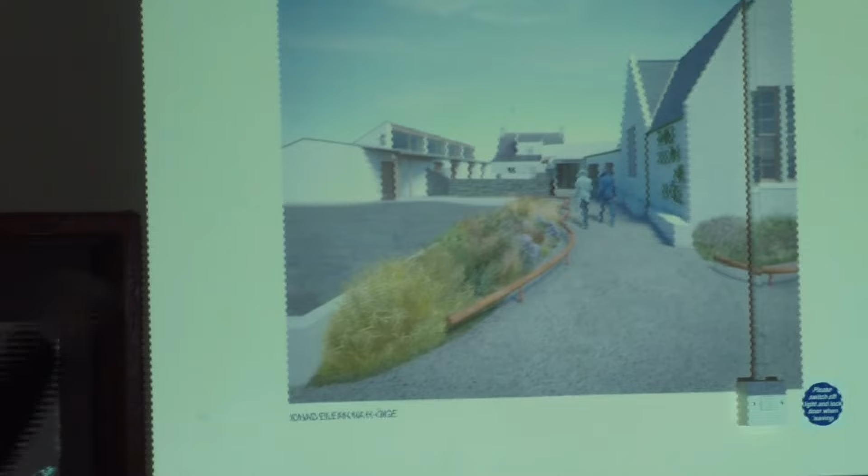And then Eilean na h-Òige, which is the working title for this project up in Eriskay - I've just come from there today actually - is essentially one where again they're inheriting a building, and it's in a bit of dire straits. The council abandoned it in 2013, I think, and the water's been coming in the roof ever since. So we're actually right now saving that. They're on site doing all the slate works, allowing all these other functions around in order to plug in and support the heritage aspect.

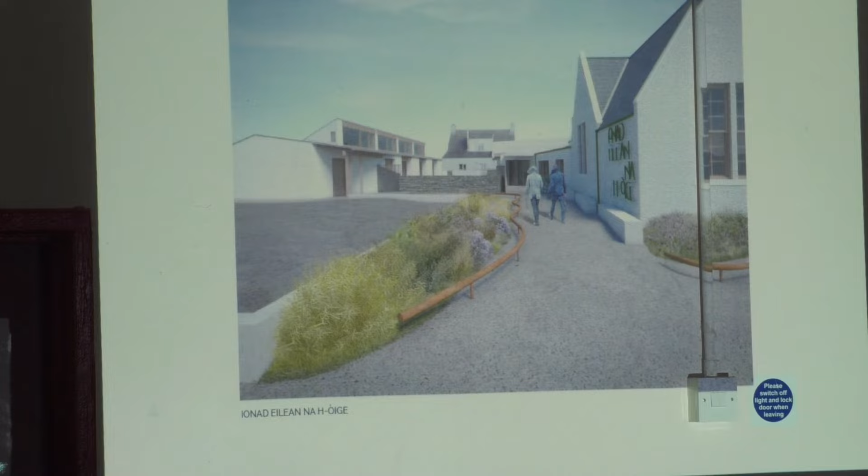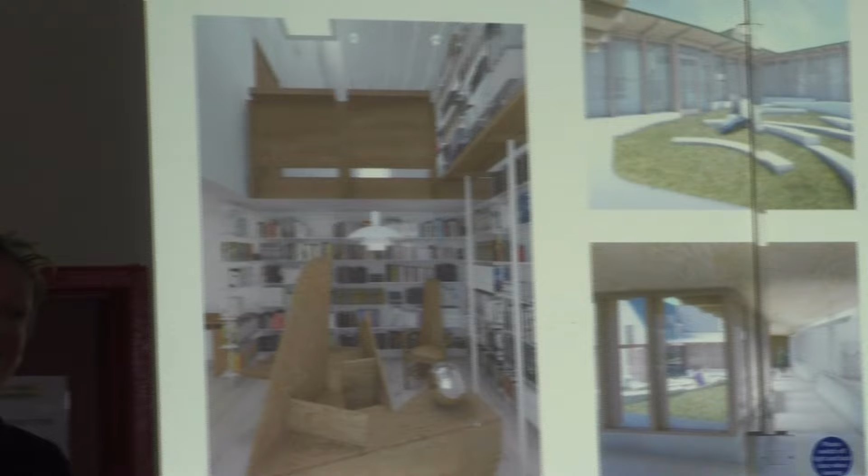You might like the models, you might like the other bit - we want your comments and commentary, because it can be adaptable, and it should be adaptable, and now's the time to do it and make sure it's right. Then critically, to record support as well - that's fundamental for the success of the project.

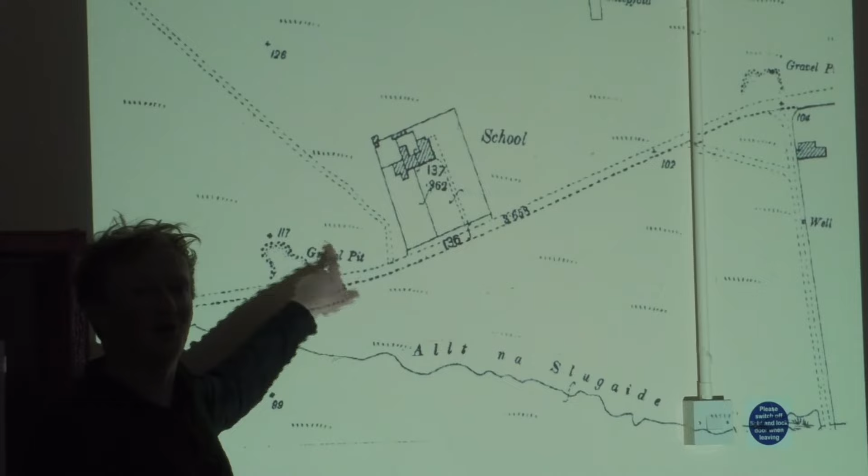So onto the interesting one, or the one we're here for today. In terms of historical parts, we go into as much history as we can in a lot of these projects. You can see here, this is the main road, and there's a gravel pit here, which is where Gordon Diesel's is now, roughly. And then the school appears here first of all in 1890.

It's not too long - a couple of decades maybe after the Education Act. But it starts off quite far back from the road, closer to here, and then starts to adapt. I'm actually just wondering if you guys can see - is it okay? I'll try and make it opaque.

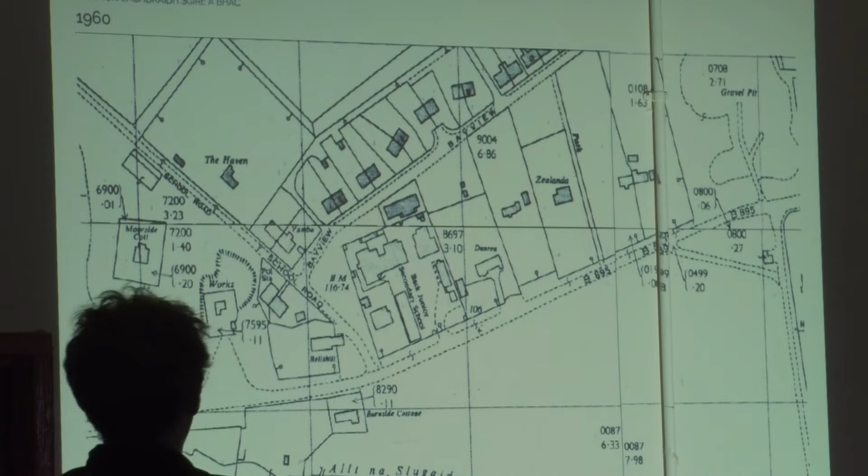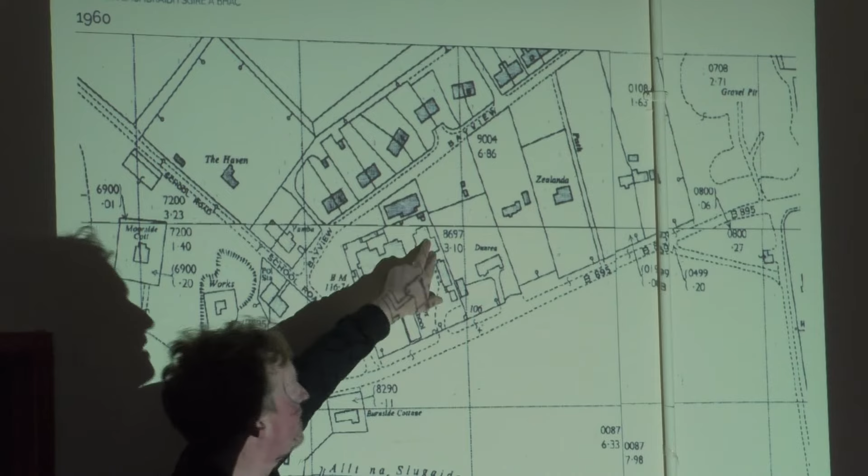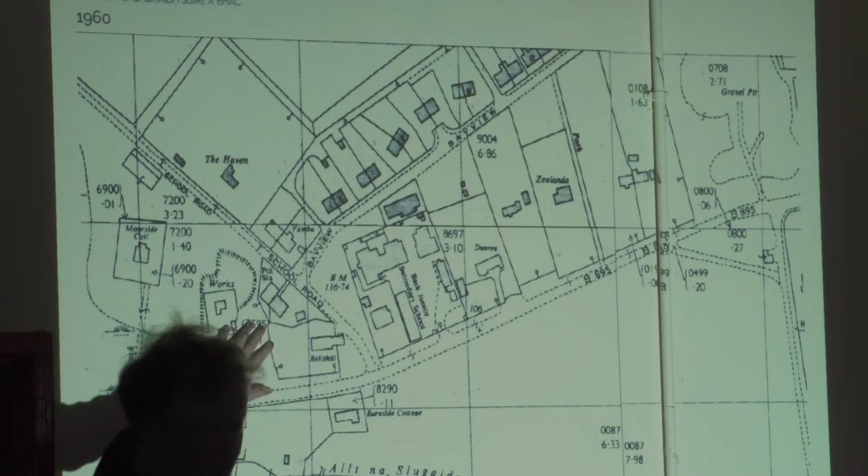By 1960, you can see that everything is growing around it. At the same time, this building, which is obviously the first one, has been extended with another annex, and there's the typical kind of flat-roofed canteens and other buildings slotting around it. The schoolhouse has been built by then. Gordon still hasn't appeared yet, not on that map anyway.

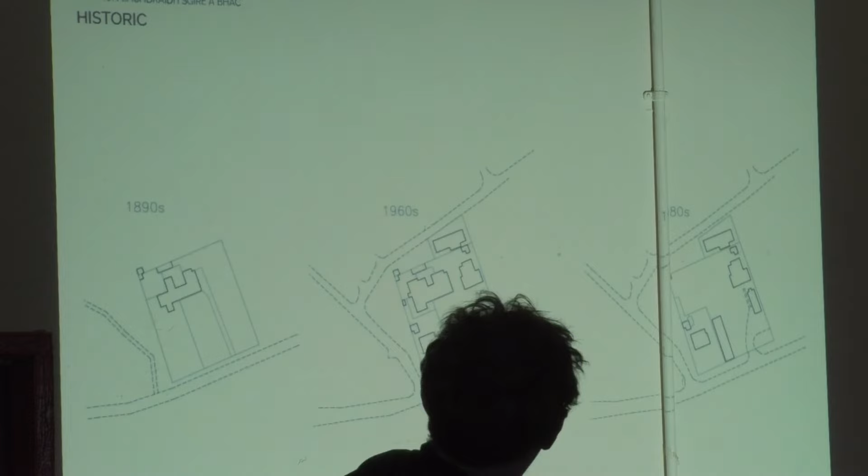By 1960, you can see some of the site starting to change slightly. Then by 1980 - oh, where is it? It's up there... here. Oh sorry, I think it's off the map - I'll need to tell the office. But anyway, there's the diagrams of the evolution of the site, and then I can't see through the pipe. In the 1980s, these buildings are starting to get demolished, and by now they're gone, essentially.

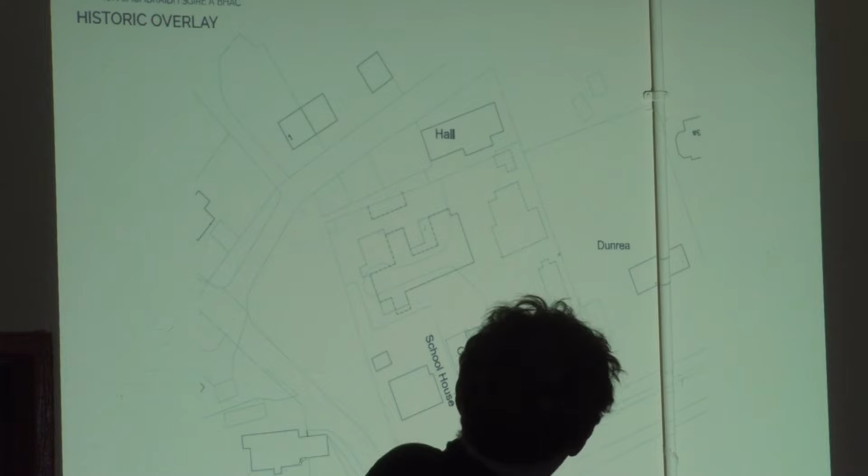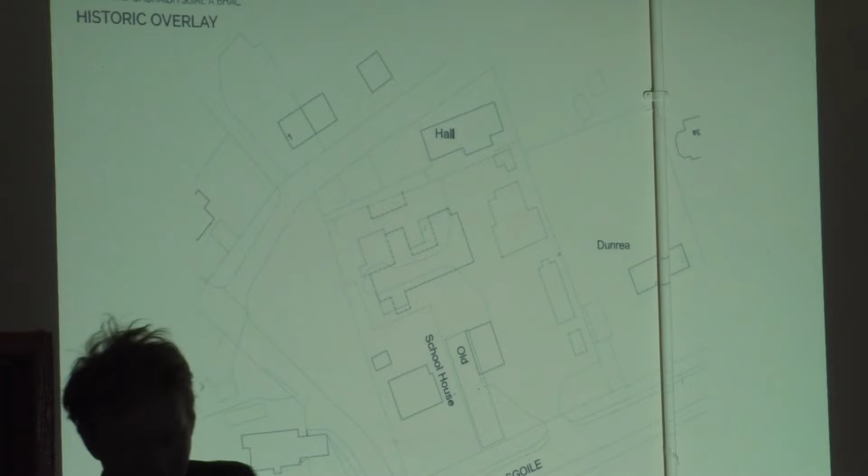That's an overlay of what we have today, which is the shed down there. In here we've got the shipping containers, but the dotted lines are all the previous buildings that were on the site - so it was quite a big camp. Well, when I say big, it was quite significant, and it's a shame they're lost, but we can't cry over spilt milk. You can see the tower here, the canteen building - I'm not sure which one of these was the ski net, I'm not sure.

I think it was one of the low ones. Was this one? Yeah, right. Okay, and then, you can see how quite lovely that is. I quite like it. But yeah, sadly gone.

But in reality, as Anna was mentioning, this site is quite emotive also - one, for it being a kind of vacant site, but also it's a very meaningful site for the fact that it was this, the school is the centre of a community really. And although we still have Sgoil a' Bhac, this site was where it was, and it's in the middle of the community as well. It's right on the main road.

And right now it's in a bit of a state. So there's kind of meaning and appropriation to it, which is quite interesting as well. But as you can see, you can see how vacant it is from space.

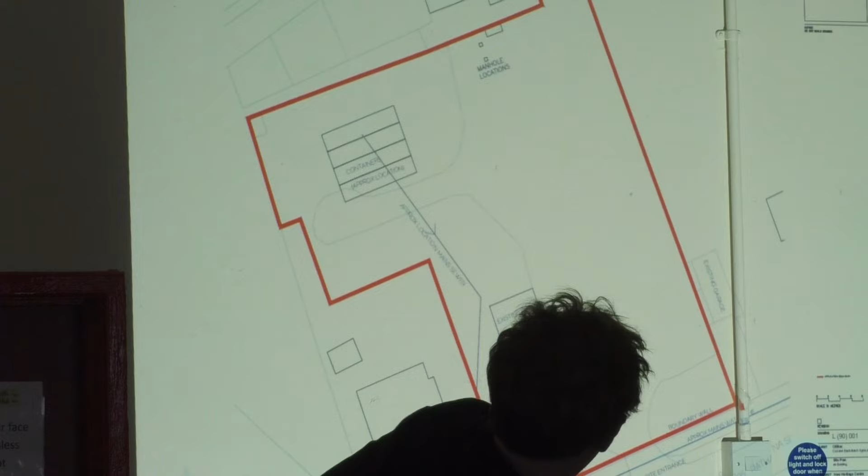And as a site as it is at the moment, going on to this - we're going to disagree with Scottish Water here. This is apparently where the water main, the sewer main is, but it's clearly wrong, and we knew that. I think we're going to prove them that it's not right. But in any case, that's not the main water here as well.

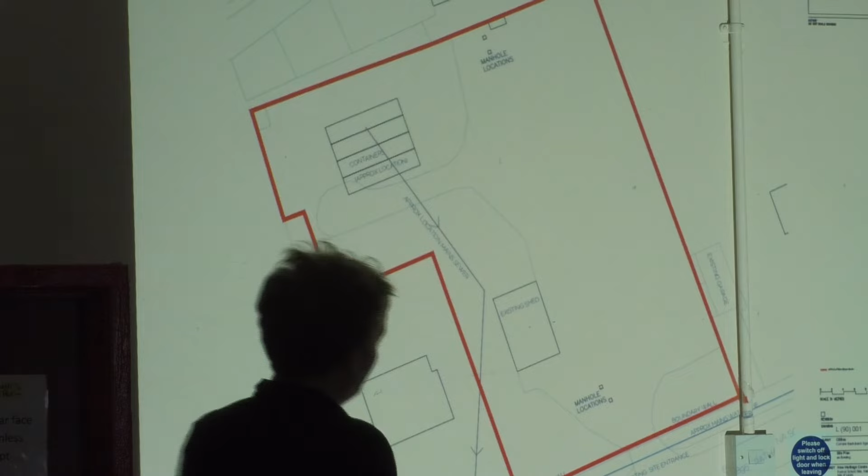But within the feasibility study, which was conducted maybe about a year ago - I can't remember, yeah, it was completed at the end of last year, 2021 - through this, the first things that we started doing was actually to analyse the site and see where's appropriate for siting a new building and where's less good.

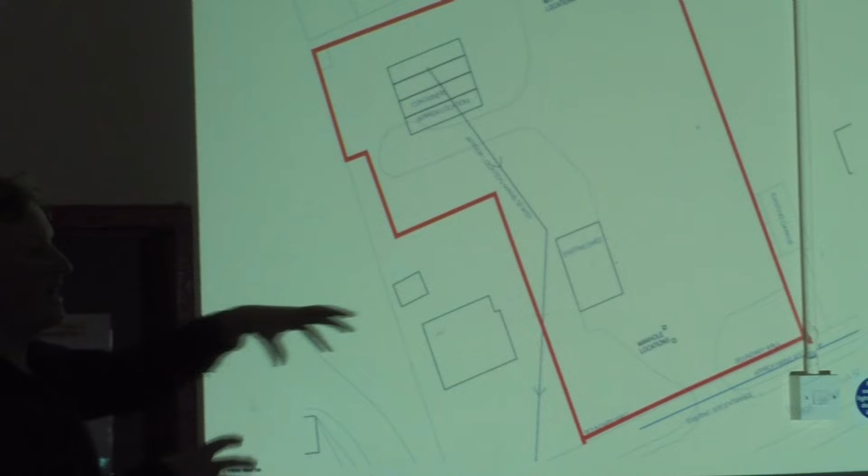So, because the red line is quite a large area really, you could almost anchor into almost anything. And the site that we've proceeded with through the analysis is close, towards the end of the road, to be open and public and to be part of that kind of streetscape, really, as part of the community, and to be seen really.

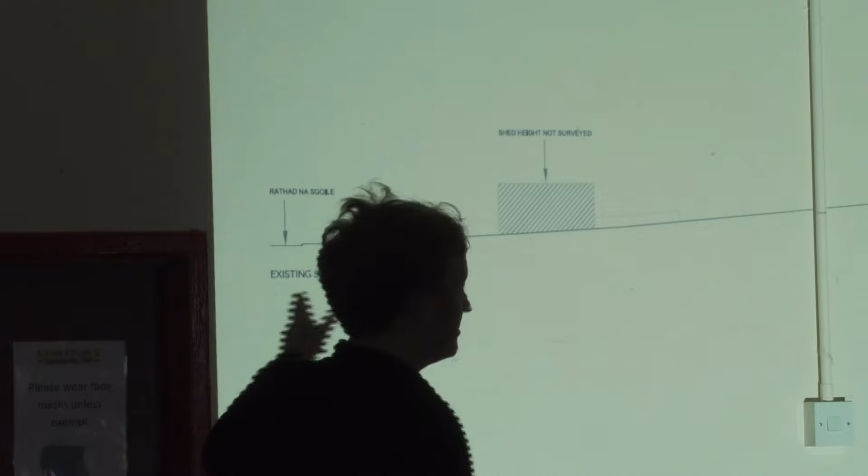And the site, although this isn't properly topographically surveyed, is sloping up the way, we think by about 2.5 meters, maybe more, from one side to the other, which has an impact on the levels, and you'll see in the design how that's there.

So in terms of the brief, the brief was to test as well as a site, to test how the building could potentially work. So the suggestion was a space for gatherings, much like this really - I'm just trying to think of whether we could fit everyone, and we could.

So in future this could be held in the new building, but also that kind of flexible space that can also be used for exhibition and display, and other events too. It could be choir practice, it could be cinema, it could be knitting, it could be all sorts really.

But there was also a discussion around not wanting to take away from the established facilities also, so larger events possibly being in the upper hall centre or vice versa. But in any case, a big flexible space in the heart of it.

Also about a small kitchen as well, which we liked in the brief, because any Hebridean welcome is always with a cup of tea or next to a stove. And an archive facility, a store facility, in order for collection of artifacts.

One thing worth mentioning is also within the community network, a lot of them actually have different - I wouldn't say priorities, but different things that seem to be their centre of gravity really. So Ness have an amazing archive in genealogical research, and also have good artifacts as well. Tons of stuff from memory, I'm not sure how many artifacts. I was going to say what we have, because I'm still Tolsta-ian, I think, and I can maybe tell.

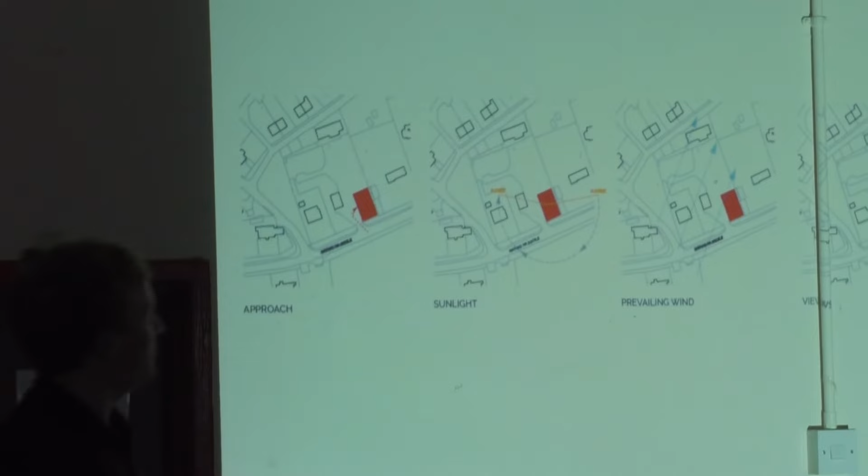In terms of site analysis, when we're thinking of the anchoring, this red blob is roughly the area we're thinking of. First is the matter of approach: one of the challenges is that cars need to park around the back, and then from the street you've got this arrangement, so the door is kind of in the middle.

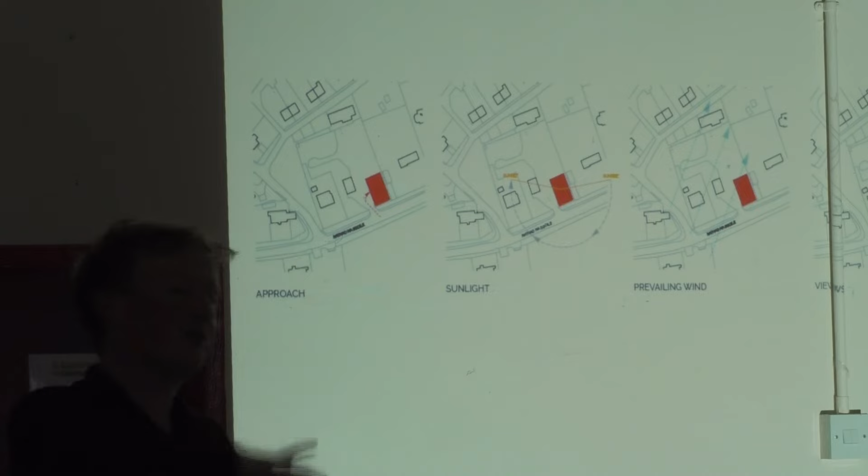The sun path, so I'm analysing where the sun comes from, where it sets, where the views are, where the prevailing wind is, which means we turn the door away from it, and the major views. So just the basics.

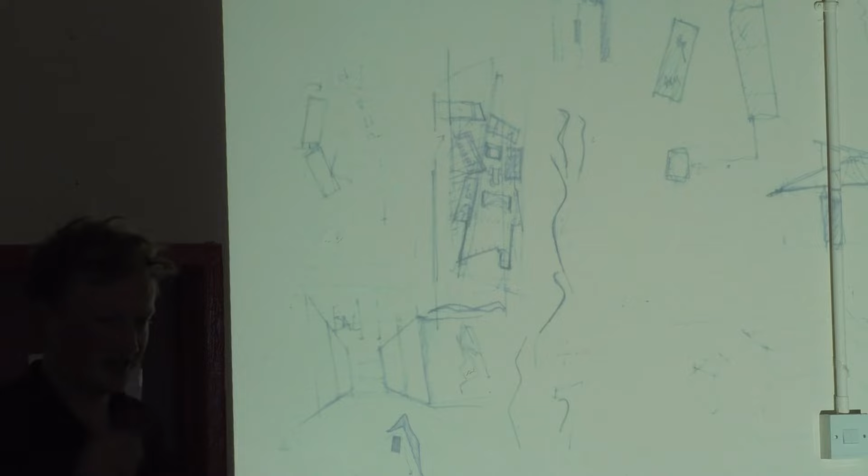Then in terms of starting to think how the brief begins to work, this is only the tip of the iceberg of some of the drawings and sketches, starting to think of concept development. In a way some of that is marks by Miró actually, Birth of the World. But anyway, starting to form a project around that, thinking of hard edges, soft edges, and arrangements.

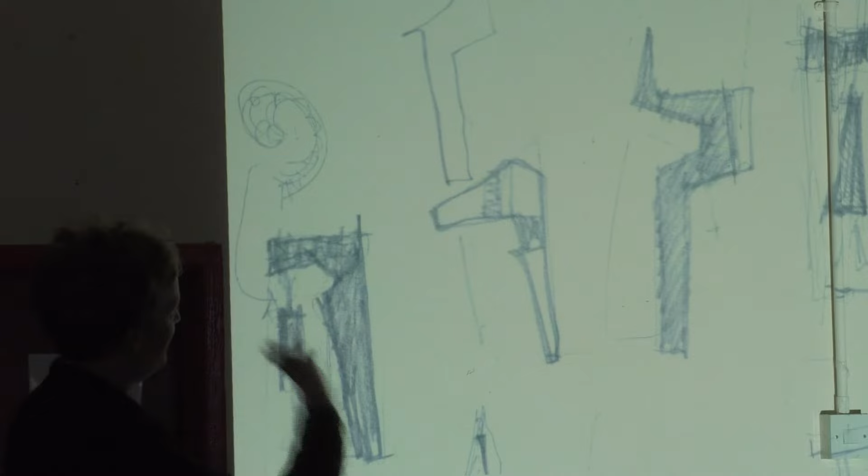Going through the arrangements, but also testing completely in order to see how it works in other directions. What we're putting forward at the moment is still capable of doing that and being adapted as it goes. So okay, a few of these.

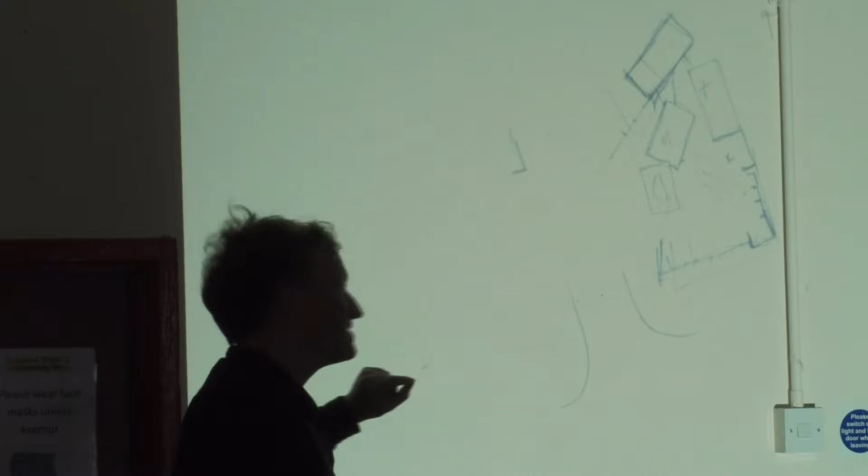Then starting to actually make these drawings make a bit more sense is starting to see how we can arrange things on site and make them work with scale. So things like the subsidiary accommodation towards the back, toilets and stores, and then coming towards the front, as you'd probably expect, in order to open it up again.

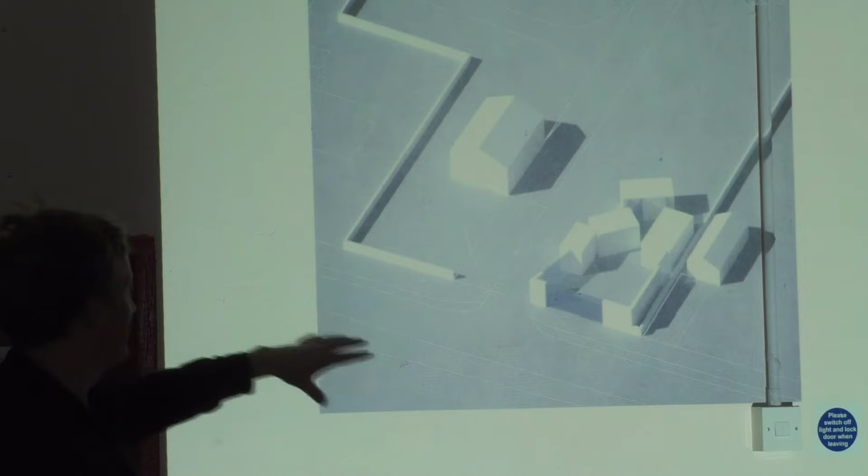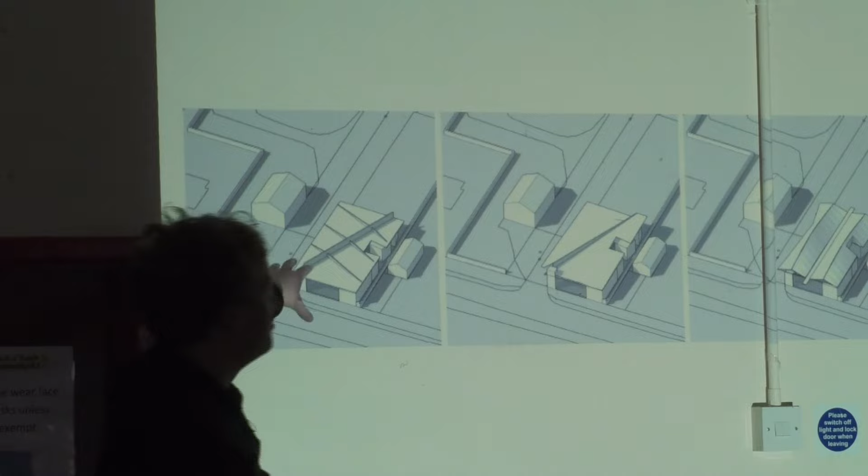Then starting with the kind of block models, which we do with card in the office as well, in terms of some arrangements, and starting to trial how these can work, and then how they develop - are we starting to get too big, do we want some sort of roof form, what the materials might want to be, and what the meaning of those materials might want to be as well.

Then things start to develop and adapt and change and test, all the way through in consultation with the community, around discussions of gardens or retail, what the nature of it could be. The reason we're showing this is just to show how what you see at the moment has come to be.

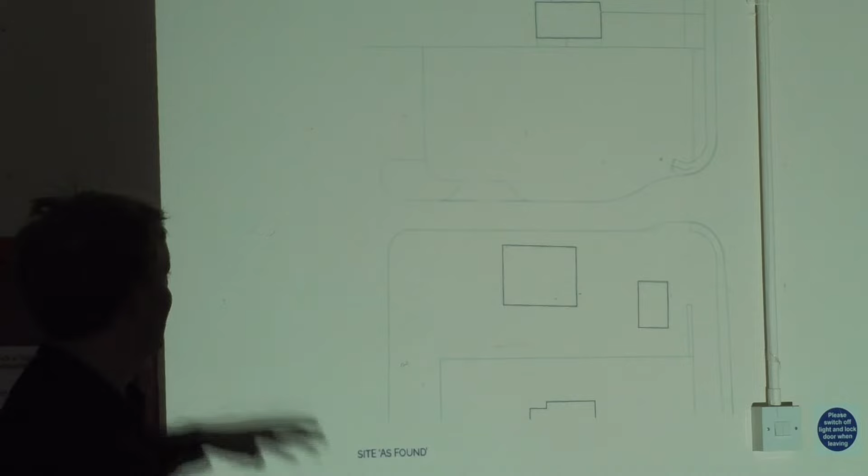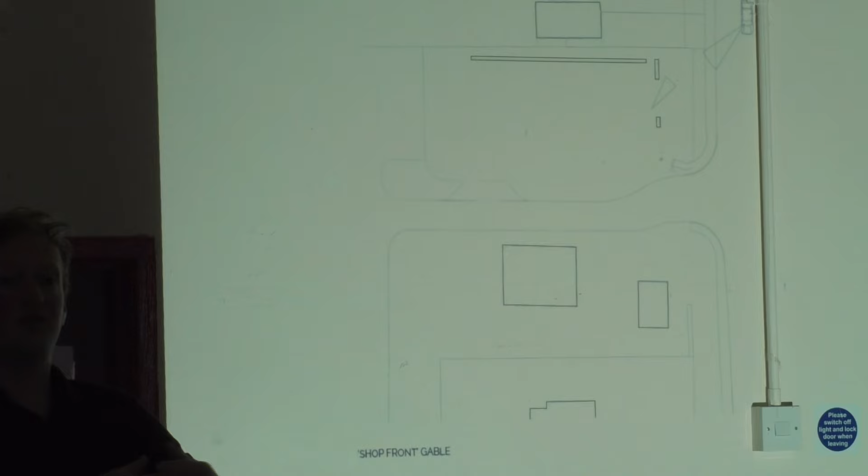In terms of the site then, we have a rough area of roughly where the building would be situated. From there we establish a boundary in terms of an edge, and then think about this gable that's open and inviting and friendly, a signal to people that this is a public building, a civic building, and you get glimpses in and glimpses out.

If there are activities going on, it's to draw people in at the same time, so that you can get people who maybe think they're not interested by history or heritage or museums, but will see something and potentially be brought in. So it's a shop front really.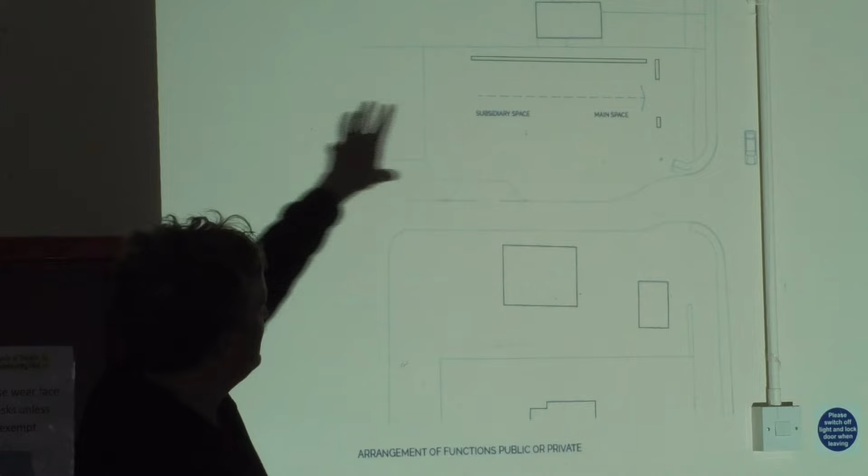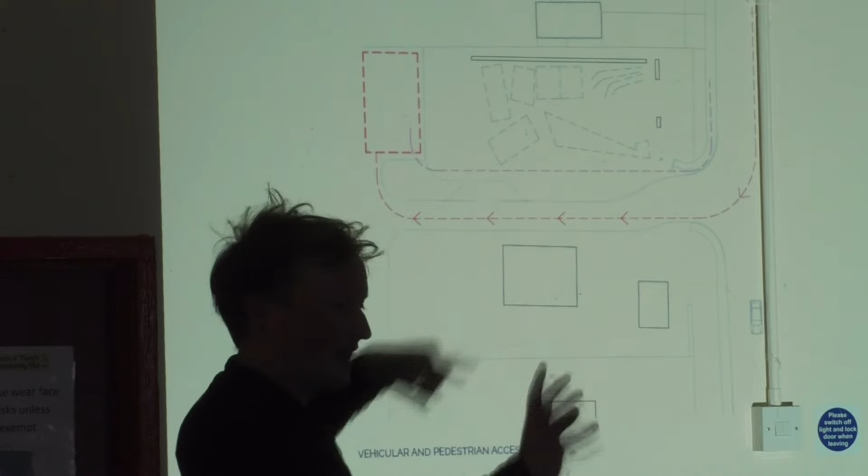Then the arrangement of subsidiary space to main space through the site, so the service spaces at the back, and then the arrangement of the brief comes together. First we have parking at the back, taken as read, the arrangements of how people arrive at the site and then at the building and exit, and where the door might be, kind of in the middle of that elevation.

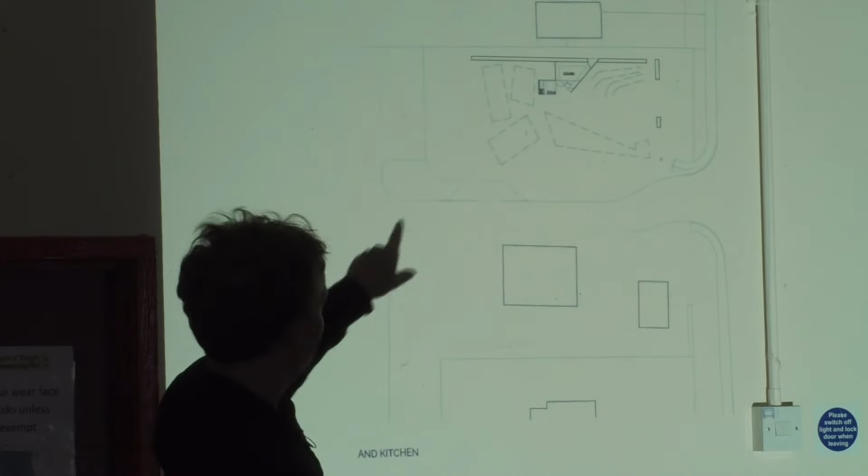Then in the middle, a stove at the heart of the project, a chimney and hearth, and then a kitchen right next to that. It's just a small kitchen, for teas and coffees, but not the kind of lobster thermidors - unless you really want to.

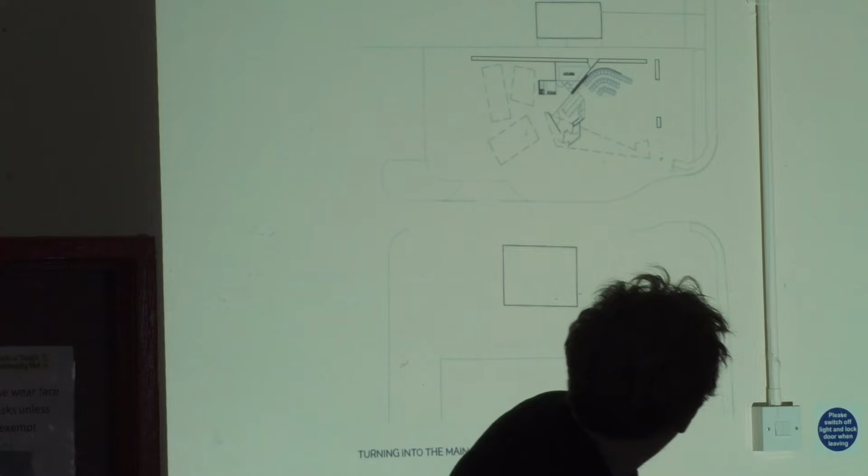Then you get this turn into the main space that falls in front of you, with an arrangement of a collection of chairs - we're suggesting a curved arrangement, but it's flexible for anything. And then almost an organic edge, areas where you can put a spinning wheel in the window, or a loom, or move it around.

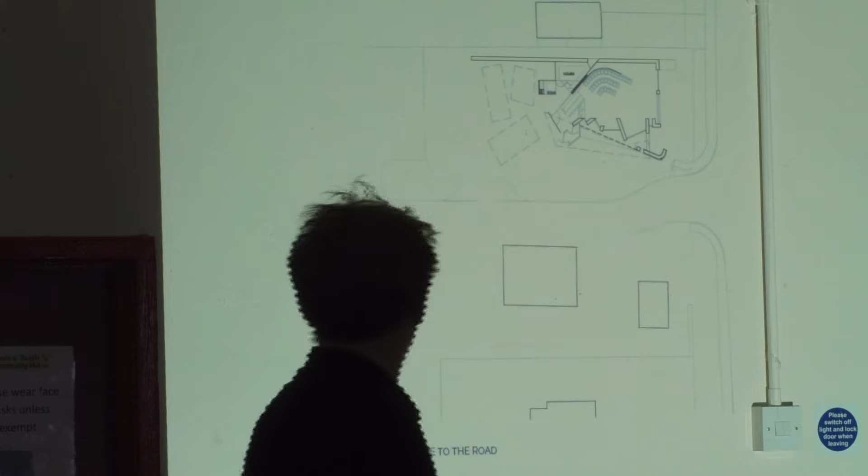So we call them the wee chapels, with a strong gable to the road as a kind of gesture, then turned slightly to look at the main view. You can stand there and in certain tides see the surf on top of the reefs down by Waterscourt.

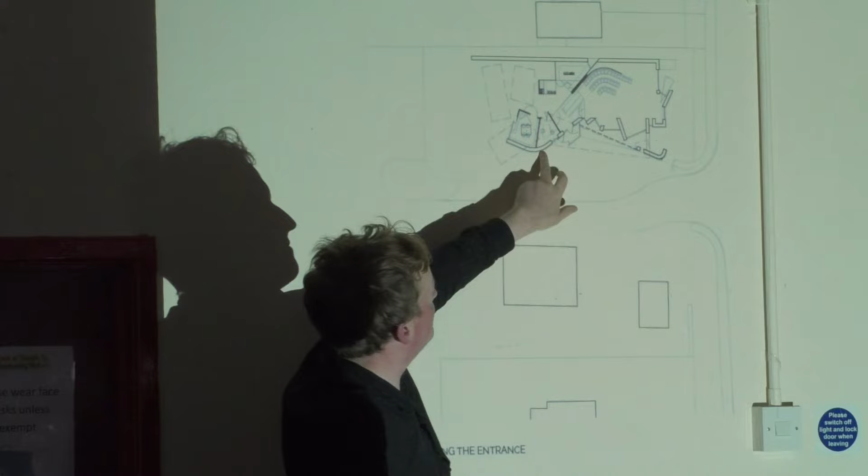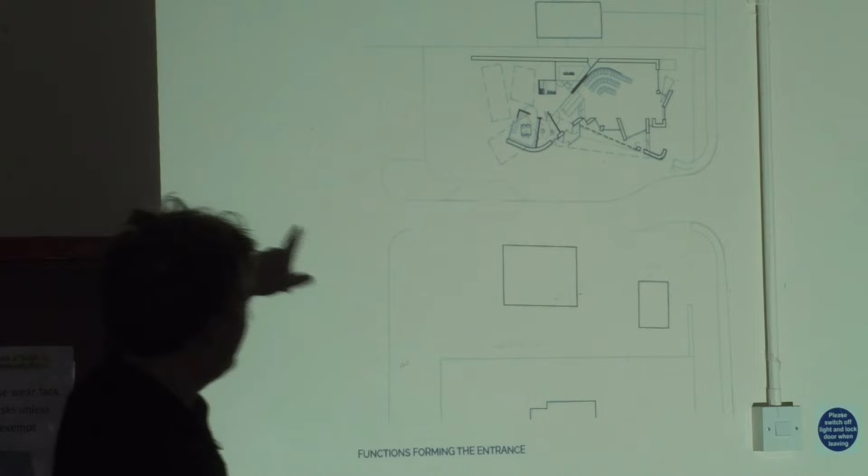The archive facility forms this edge, becoming more organic against that straight edge. Here you've got the office, which is a control point so you can monitor what's going on and greet people as they come in. Then the archive towards the back, where there's no direct daylight to damage the files.

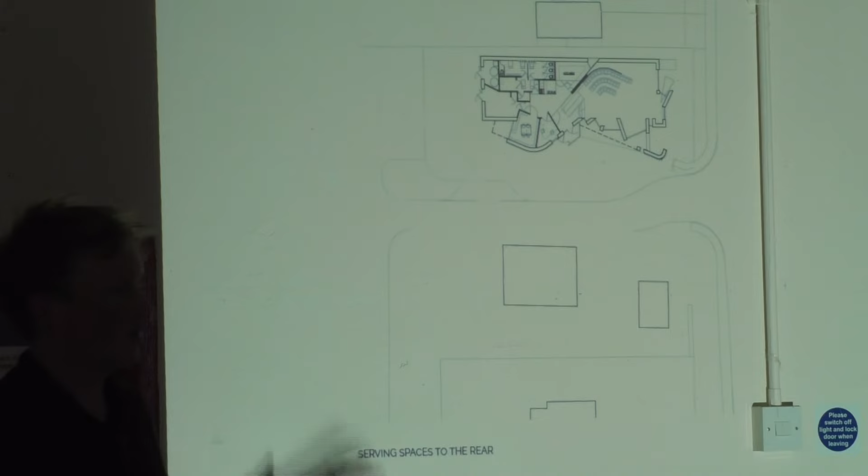And plant rooms and storage towards the back also. It's worth pointing out the low carbon aspect - this will be highly insulated, priced as a highly insulated building, but also done with appropriate materials. Because you don't have to upgrade an old building, which can be very difficult, in this case we can go for supreme standards early on, and it's worthwhile. It takes down your running cost, and it's the right thing to do.

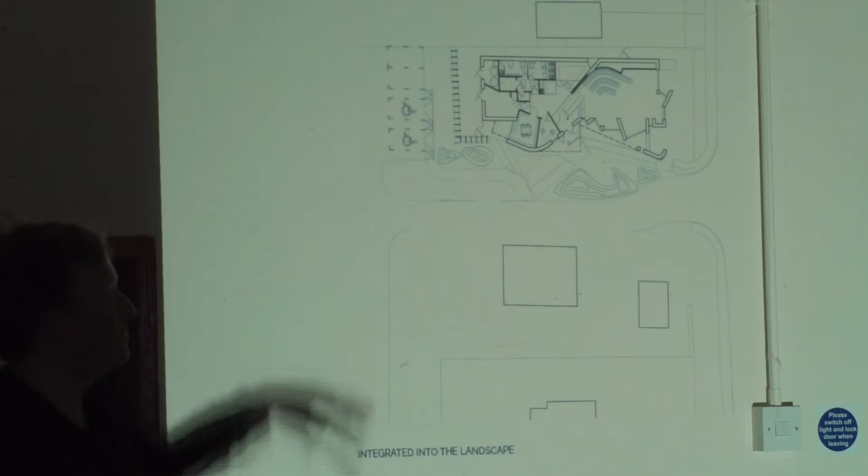Then how we integrate into the landscape - with the difference in level between top and bottom, it's an opportunity to sculpt the landscape around it and bed it in a bit. And that's a kind of three-dimensional view of how things might work, in terms of the door, the chimney, the seating, and everything falling in from there.

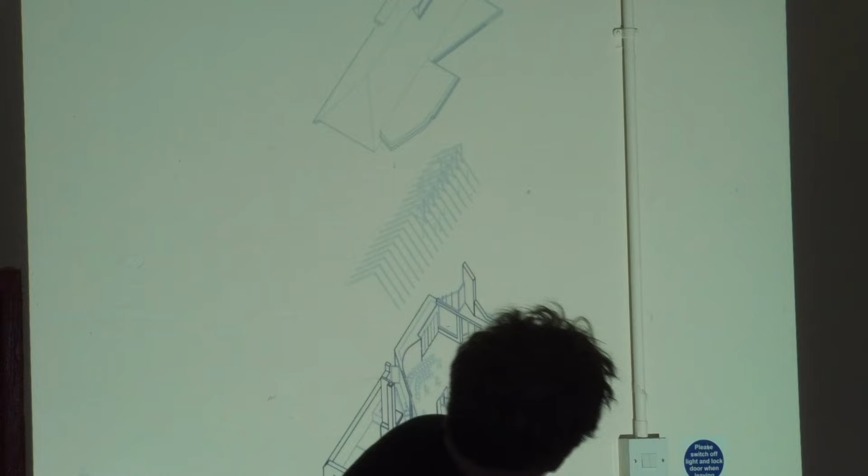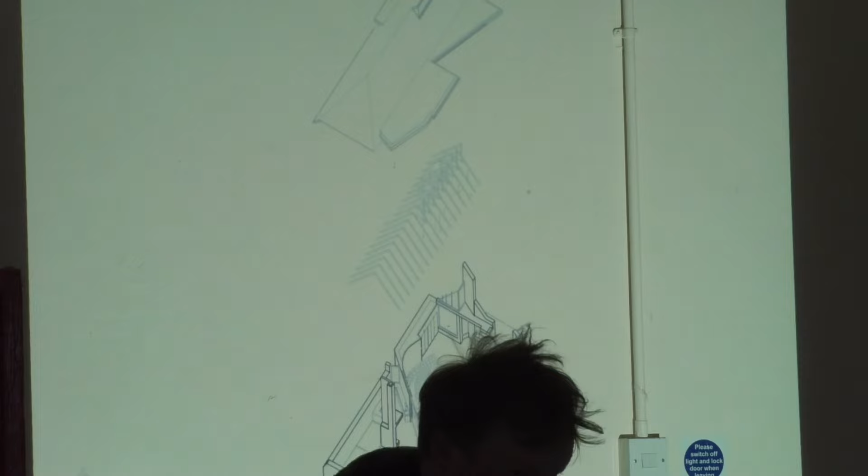If you have a really strong hurricane, the roof still shouldn't fly off, but this is just a view trying to show how the roof structure and the different layers might work within the volumes, which we can also show on the physical model caged in that box over there.

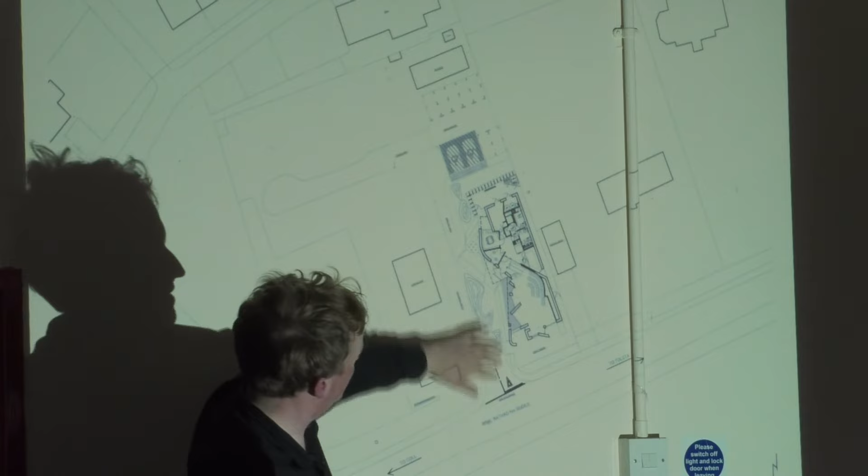And then how it could sit on the site, identifying the parking area towards the back as an approximate at the moment, and the building coming in along here, with a slight standoff to give breathing space between pavement and building, some landscaping around here, and this entrance coming in as a more defined route for vehicles, trying to make it safe as well.

So the model - unfortunately I can't claim credit. I'd love to do it, but I don't get anywhere near the fun things as much anymore.

This is Charlie - you can see all the used blades in there. We like building the models, and the company actually asked for this model to help with consultation. It's kind of a bit like a toy, but just be careful - it's a very useful tool for testing and showing how the forms work, more so than drawings.

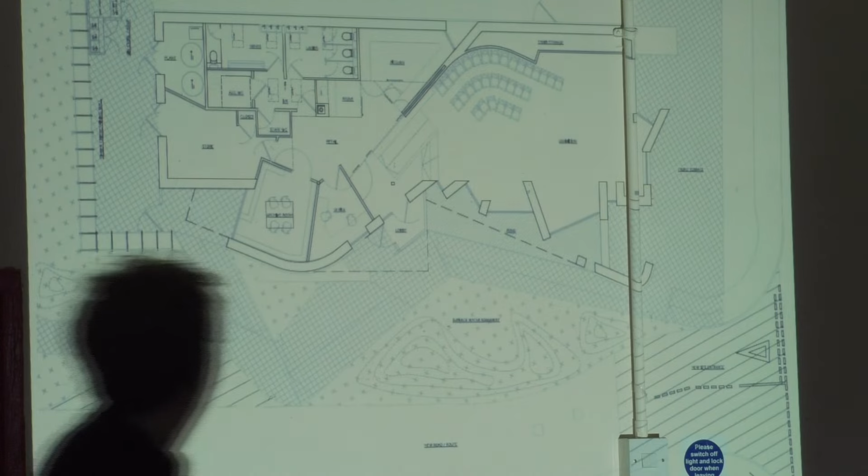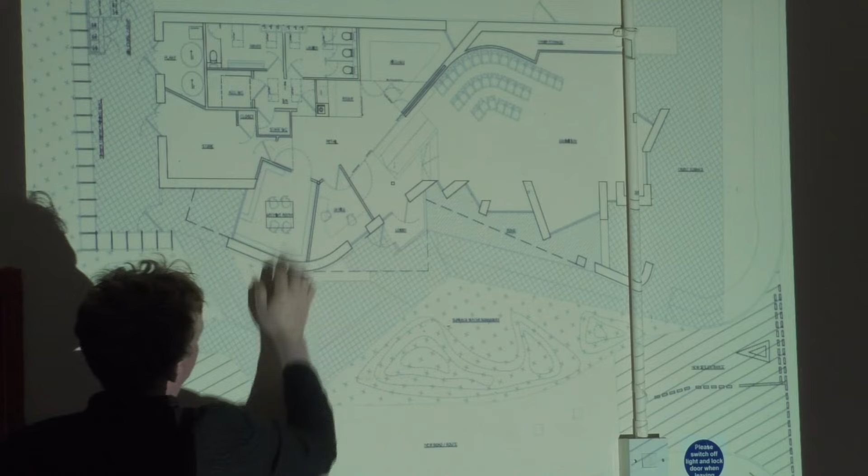Talking about drawings, this is a zoomed in version - the pipe is distorting the cable there. You've got this moment where you get the ramp down into this area, ramp and steps down into the main area, kitchen, store, toilet areas, plant room, storage, archive, and then this fold that takes you in towards the door, with a sliding screen that can screen off the kitchen or the main space, so you can boil a kettle without disturbing whoever is speaking.

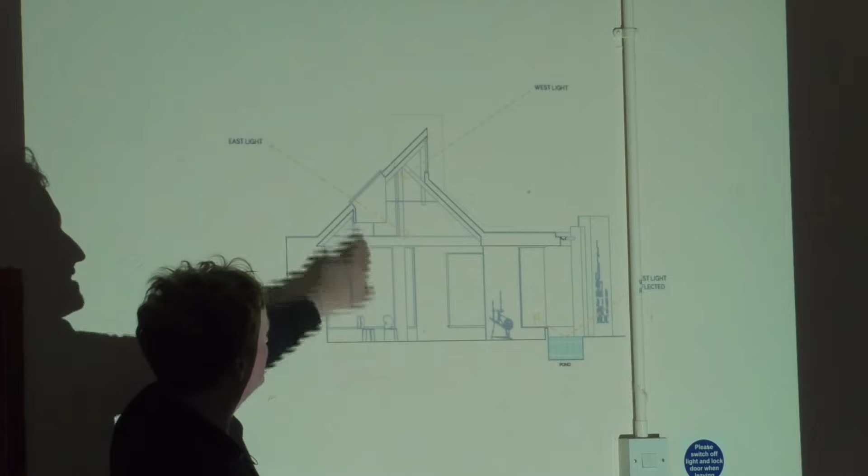And then how it works in section as well - we've got a roof light to try and drink in west light and bounce it, east light on this other elevation, and in the south reflected light off a little body of water, so you get the wee speckles. Just wee details, just thoughts at the moment, but that's how the spaces have been thought of.

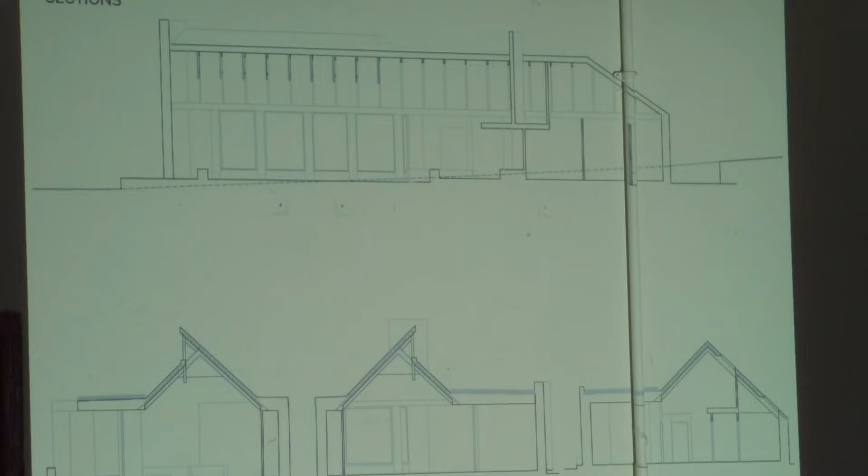You can see how the building steps up slightly with the land, integrating into these other elements. In reality, at the moment we're thinking timber frame, a slate roof, and blockwork walls around a timber frame, painted out white.

So it's quite traditional, but done in a slightly different, more considered way, maybe potentially - a painted out blockwork. We're going to experiment with it slightly, but experiment with a small e. That's how it looks from the other direction, from the south.

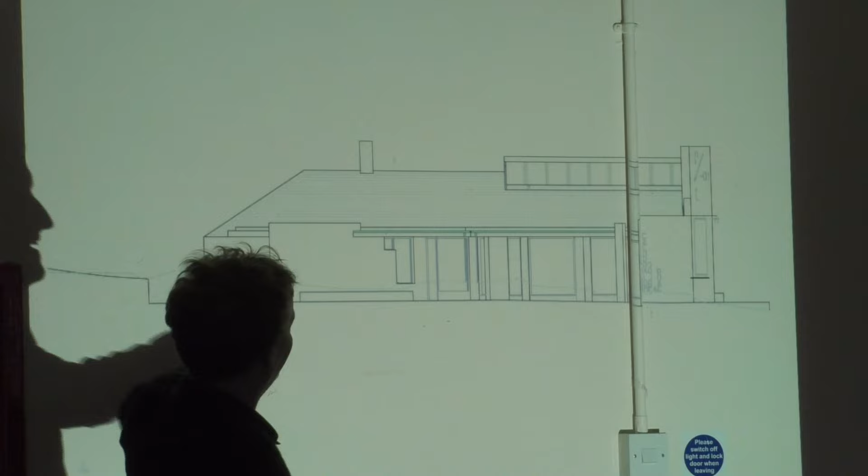I'm just thinking, is Santa arriving with your building?

That looks from there, from the southern elevation. In a common sense approach, the south being a bit more open makes sense. We did this view almost as the first iteration, and we were insistent that the church should be shown, because it's another one of the civic buildings, as part of that streetscape. What we have along here is your chimney, your roof light, this element with the banner showing the name of the building, and up here we have a barometer on the front. Everyone's got a clock on their phones now anyway, so we're thinking this gesture of what's approaching reinforces that element of it being a civic building, a landmark that people look out for. You start to see these parts of activity in here, and the landscaping doing its thing.

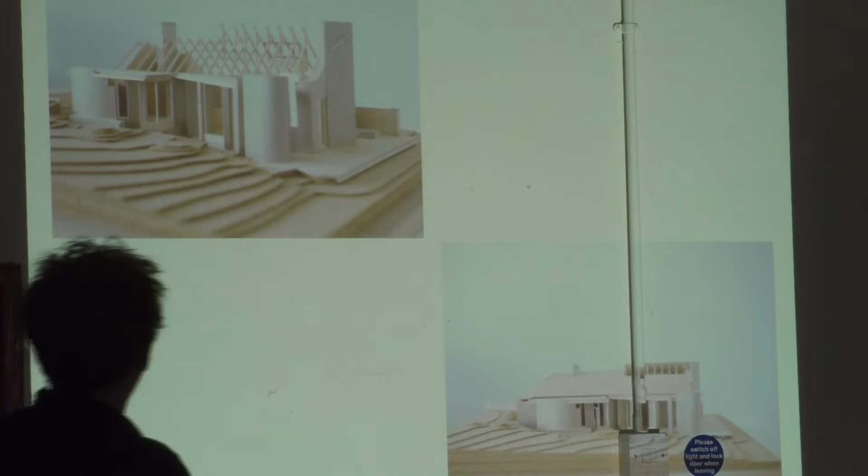And then that's the model. We'll show you how the roof comes off in a wee while. The model sort of tries to show the same thing but in a different way, the same forms. You get these wee pockets of space externally, so we wanted it to be inviting and friendly even when the building's closed.

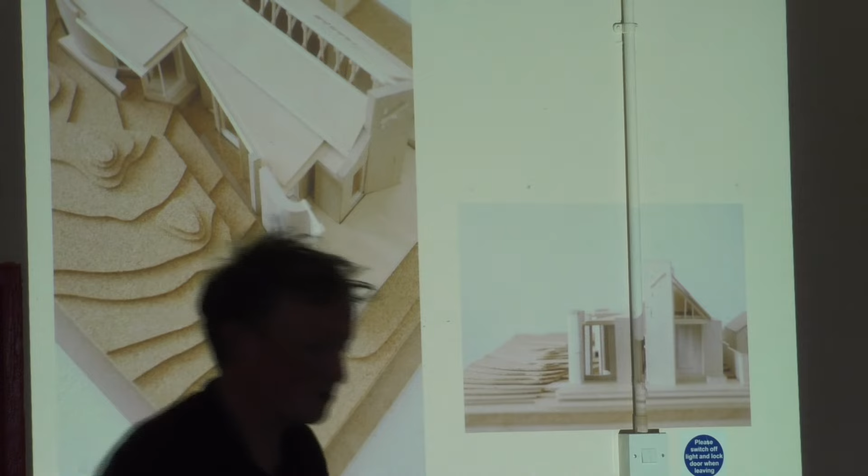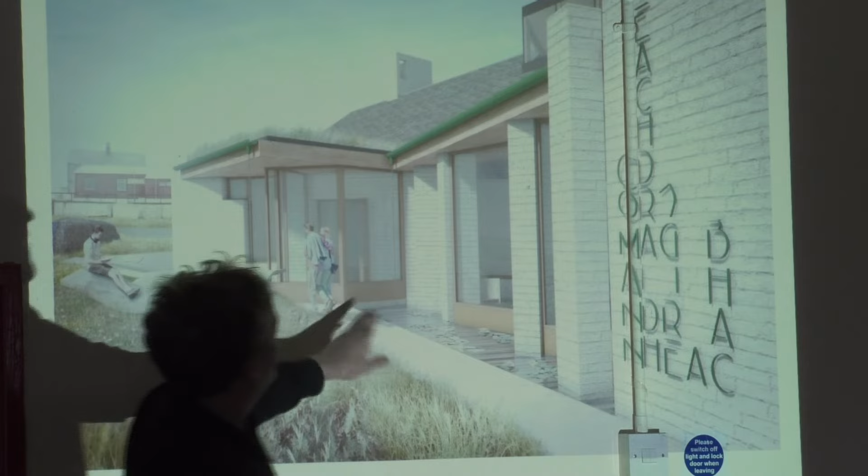That's the name there. We have a bench here—there was a shout out to Miralles earlier on, so this is a bench by Miralles, like a magic carpet in concrete. They're lovely, very comfy actually. There's one outside Parliament, and peat stacks too.

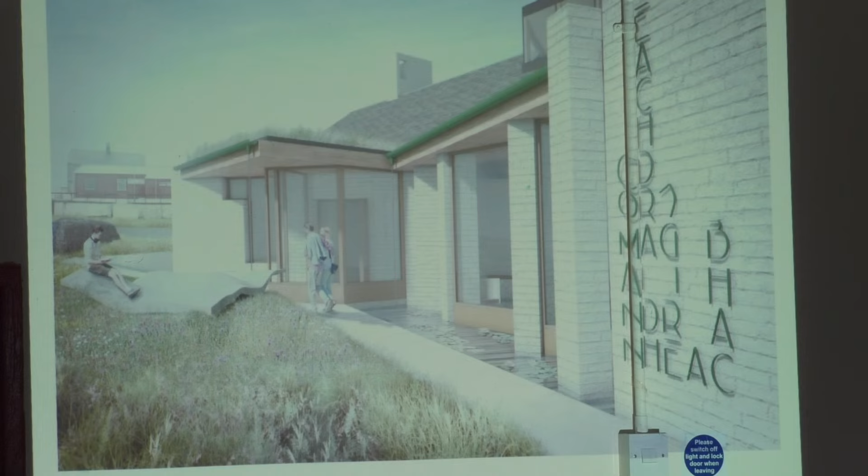But anyway, the site around the building should be thought of almost like exhibits in itself. It could be ploughs, hopefully there's a Massey Ferguson wanting to be there, whatever—using the landscape as an extension of who you are and how you function.

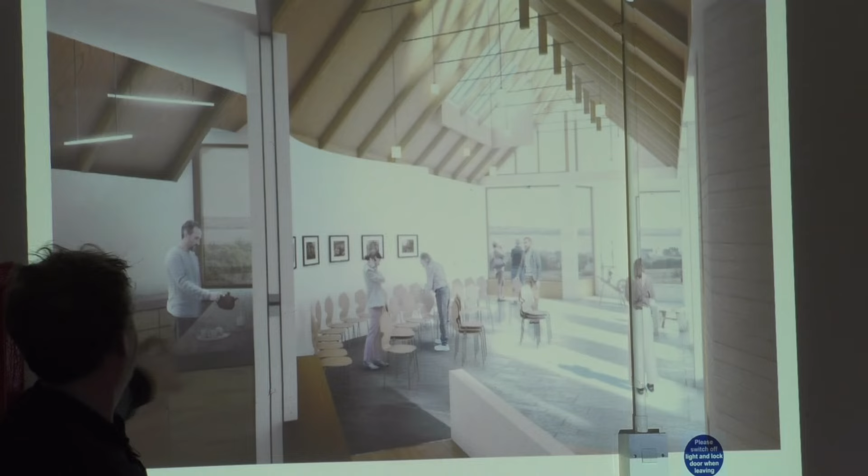And then when you enter the building and turn, first you see this is your kitchen, so someone's been allocated to make all that tea. Then the space has a slight drop, slight change of material on the floor, letting all the light come in almost like a sundial all the way through the day. You should be able to be in that space all day and just watch it, then look out towards that view in the landscape.

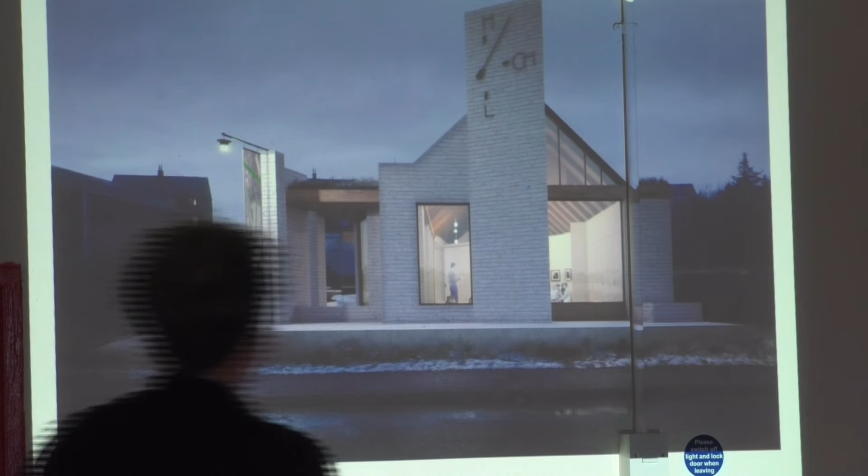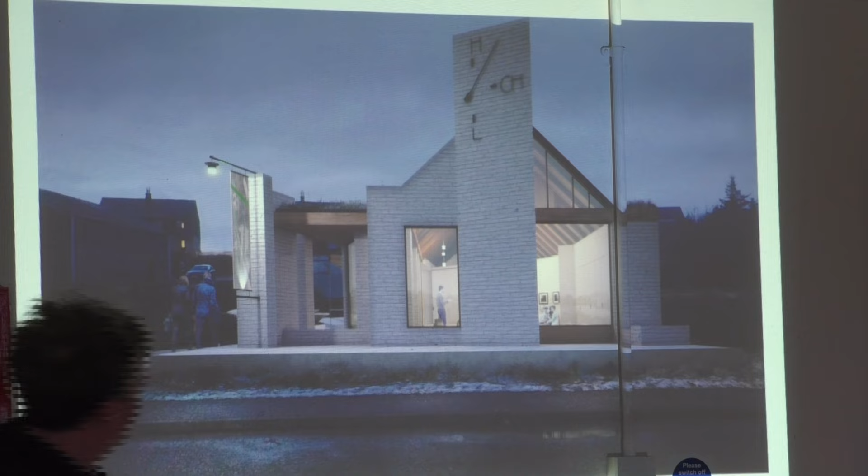We also have these horizontal ledges, because floor space it is quite a compact building, but these spaces where you could put things up high and kept out of the way, instead of going into a box in storage, they become part of the decoration of the building, and the people being the decoration too. Probably more important is how it could look from the road at twilight or dusk, that warm, inviting roof thing drawing you in, along this kind of plinth here too. And as you can see, the weather's getting better at the same time.